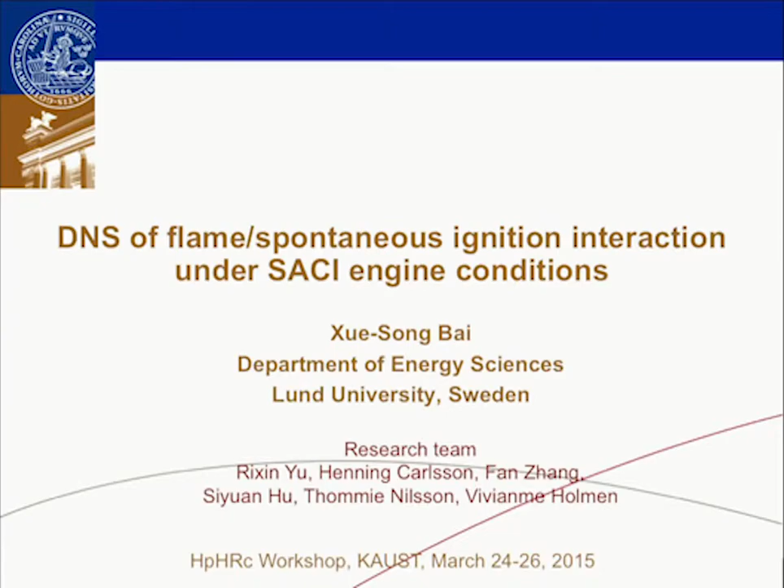We have a research team here. Dr. Rixin Yu is the PhD. He worked with me for many years from his PhD study, and he's the one who developed the DNS code. We also have Henning Carlsson and Fan Zhang, students working on applying the code to different problems.

I have the luck to work in Lund with many excellent researchers. Marcus Aldén yesterday presented the laser technique, which is excellent and can be used to study many different things. We also have a group working on internal combustion engines there, led by Bengt Johansson, some of you may know him.

I'm part of the research activity there, doing the modeling work. This slide I borrowed from Bengt Johansson gives an overview of the recent development in IC engines. We still run SI engines and diesel engines, but we have a challenge: we want to improve efficiency and decrease emissions, and there we have to do many things.

For example, in the past many years, people have been working on the HCCI engine, which is, in my opinion, a hybrid of the diesel engine and the SI engine. There we try to use a homogeneous mixture and compression ignition, using the lean burn concept, so we can have high efficiency and low emissions. But we found that the control of this engine is problematic.

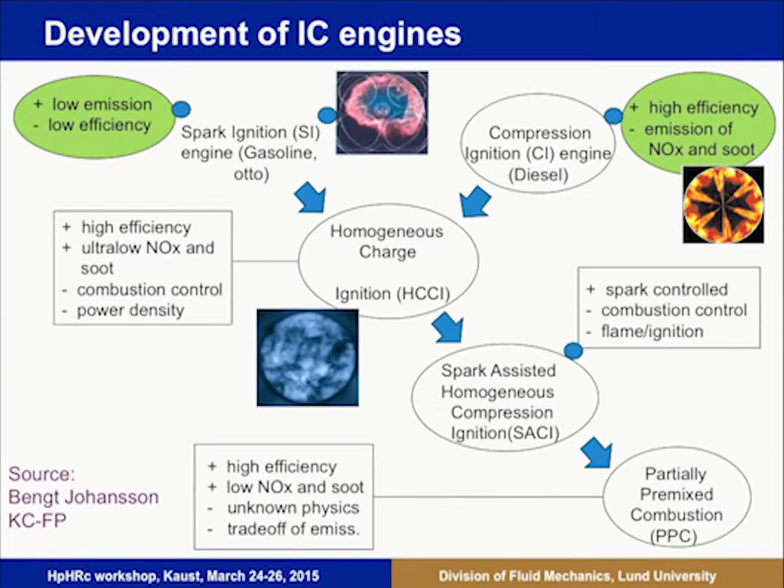Recently, we've gone one step further, or one step backwards, depending on how you look at it. We are working on the concept called partially premixed combustion, compression ignition engine—a type of diesel engine using direct injection, but with early injection, forming a partially premixed mixture. I guess Dr. Kalghatgi, you were the one who showed that using gasoline in this type of engine works very well, because it works as a PPC engine.

We have a small group doing modeling, but we're asked to model these engines, which is actually mission impossible, because the current models available are mostly for SI engines and diesel engines. For these complex engines, we need to go one step back and look at the fundamentals of how this engine combustion structure looks. Before that, we cannot say we have a model that works for this type of engine.

Okay, there's some problem—it's the internet. That's why this is good motivation that we don't just do the modeling as such; we go back to DNS studies.

We have a DNS code developed over a 3 or 4 year period. Thanks, John, for giving a good introduction of this method—we read your paper, and actually we did the same type of numerical methods. A little bit different is that we don't use this AMR, this local refinement; we use Cartesian grids, so we can do simple coding with high order schemes, and we feel that gives more accurate results.

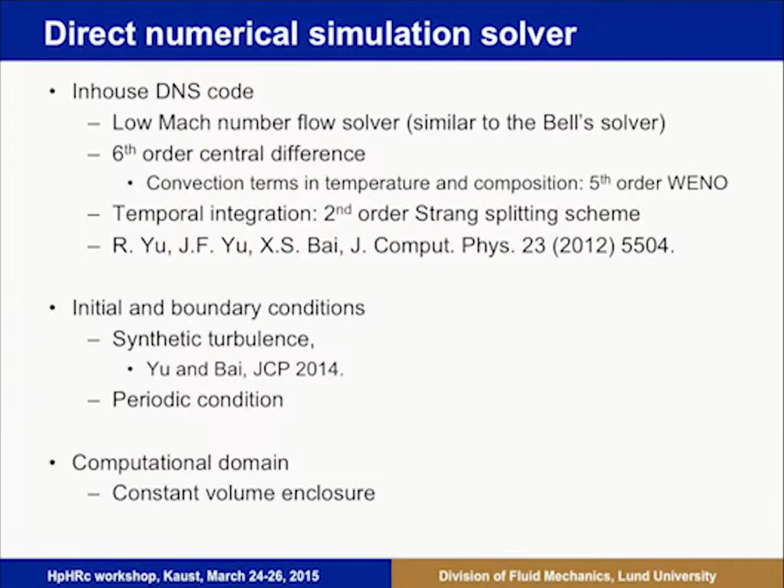So the computation domain has been a constant volume enclosure. This is the closest relevant to IC engines, constant volume enclosure. But we also developed a way based on the low Mach number formulation, the compression effect. The H term actually in John Bell's equation, the pressure equation there, you can include compression effect.

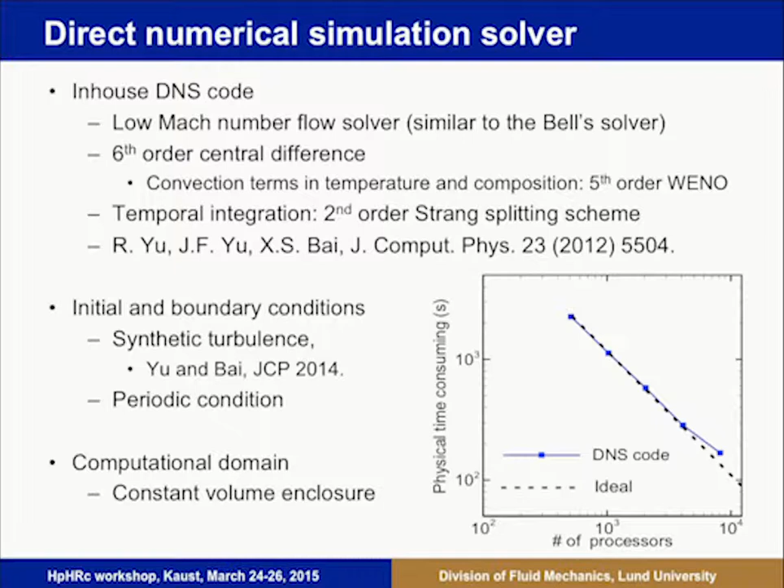So the code has been running up to 10,000 CPUs. It's a very good scaling in parallelization. So I want to give you first a few examples of this code application.

So what we did is, you guys did a 2D DNS. We want to say that this is HCCI type of work. So 2D DNS is okay. So our question is, how about 3D DNS? So we have a 3D code. We want to compare 2D DNS and 3D DNS to see if there's a big difference. I can tell you already, qualitatively they do not.

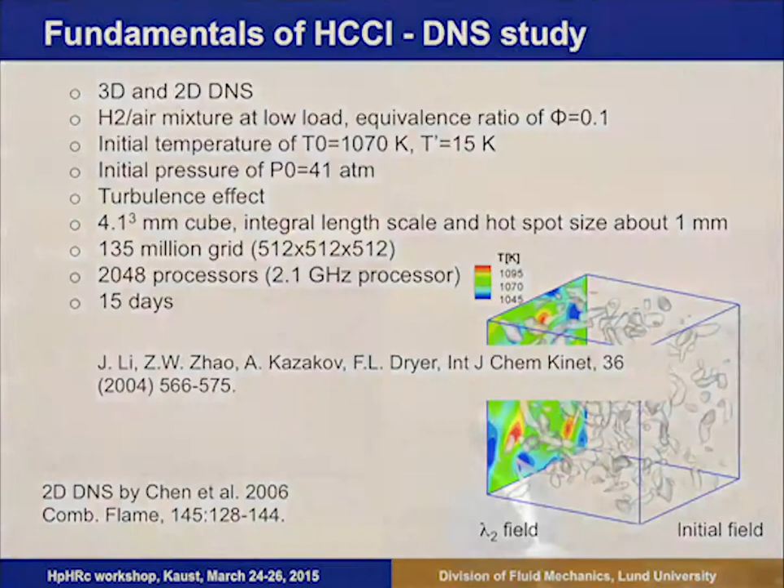Quantitatively they may have some difference because 2D is not 3D. But if you look at the statistical properties, they are very similar. So we're using detailed chemistry from Dryer's group. And here is the difference, the comparison.

In 3D, one of the major discoveries in Eva's work and Jackie Chen's work is that you found that in HCCI you could have flame type of propagation and also ignition type of propagation. Flame propagation, the flame front propagates very slow, and ignition propagates very fast. So here the color is coding whether it is a premixed flame or an ignition front.

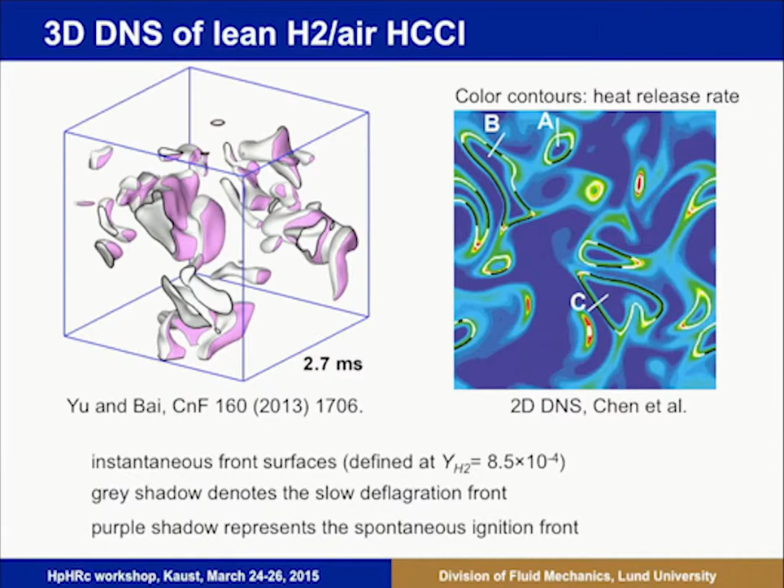What we found is that in 3D, of course, it's not a line anymore, it's a surface. Indeed, you have a premixed front and you also have an ignition front. Some differences between 2D and 3D lie in that you have a curvature, 3D curvature, and also the evolution of turbulence and temperature stratification is a bit different, but that's all.

So comparing the global properties, this mean displacement speed, we see a very rapid decrease from the beginning ignition, and then we see a flame propagation period, and then finally everything auto-ignites. So it burns very quickly at the end. And this is the evolution of the flame surface area.

Sorry, this is the internet.

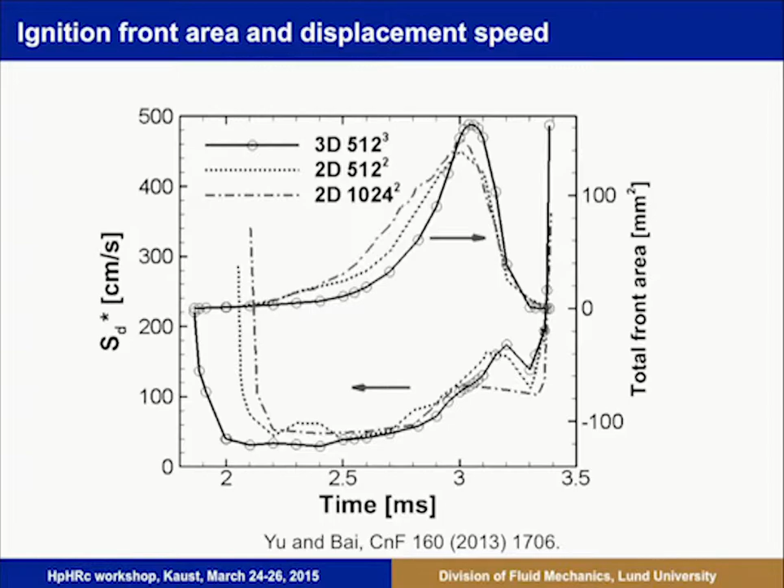2D and 3D are actually differing a little bit. This is a statistical property, but we also test the grid dependence. In DNS we do have a grid dependence, but usually we cannot do a lot of grid refinement. For this case, we did that, and qualitatively they're okay.

The next example I want to give you is the newest PPC concept. PPC engine works better than HCCI, but there is a trade-off between soot, NOx, and unburned hydrocarbons. So the question is why? Engine experiments show this behavior, but it's very difficult from engine experiments alone to understand why.

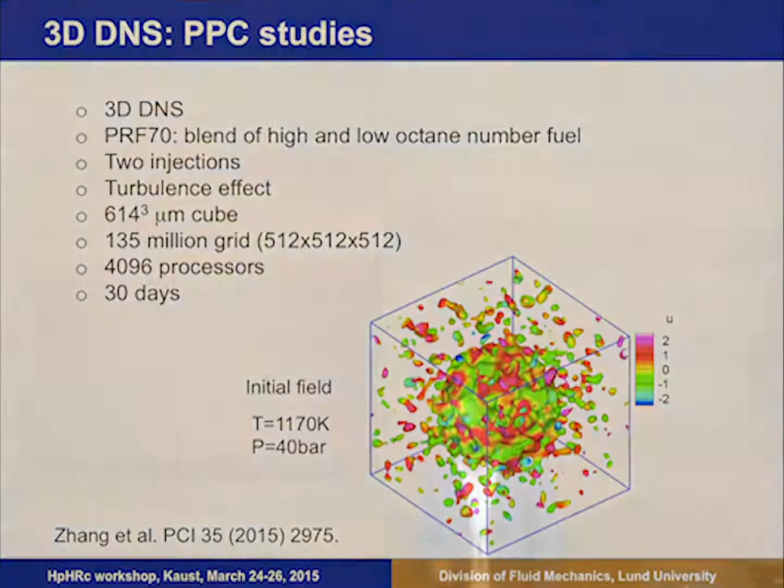So the heat release zone is 10 times smaller. So we have to decrease the grid size, the domain size by 10 times, basically. Otherwise, we would need a 1,000 times bigger computer to do the work. So this was the case. We presented this work at the symposium last time, the previous symposium.

I want to just give you a short highlight of this work. In short, what we found is that in a PPC engine, you have an HCCI type. This is from the early injection mixture. And there it runs like an HCCI.

It's auto-ignition. This is HO2. You can see the heat release rate. You have a volume rate ignition process going on. But what is more interesting is that at the fuel-rich center part, we actually have very thin layers.

It's almost like a flame there. So thin reaction zone. This is 20 microns, so it's very, very thin. You need to have 1 micron resolution to solve this problem. And you can see that the center, this is a PRF fuel. In the center rich part, it's not chemically inert.

It's actually low temperature ignition going on, which can be visualized using this HO2. As you can see here, initially at the edge of this fuel rich pocket, you have RO2, and then it's a volume rate ignition in the center fuel rich part. And then everything is converted to CO, carbon monoxide.

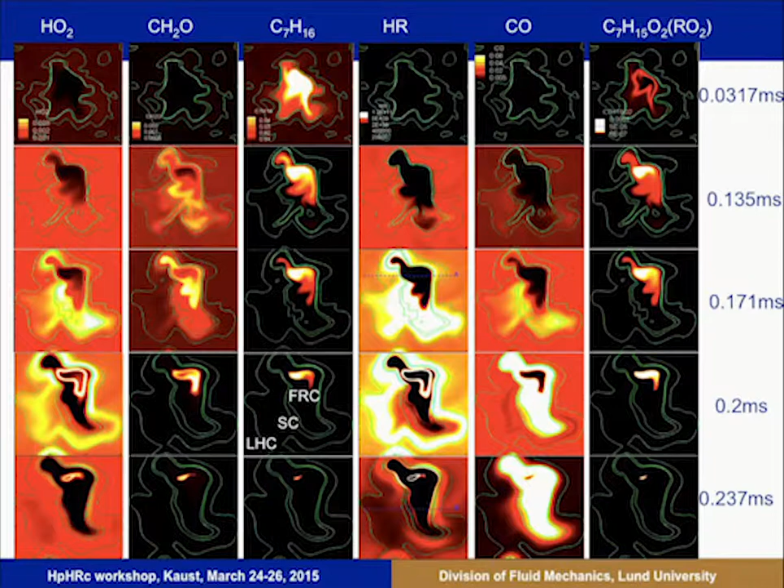And carbon monoxide, here is the bright zone carbon monoxide, is very hard to oxidize. And this is where the thin layer of the flame does the job. So you can imagine that turbulence will play some big role in this type of engine. So even though it's a very small domain, we can learn a lot from that.

We also apply the solver to fundamental problems like turbulent flame interaction in an inflow-outflow domain with a periodic boundary condition. John has shown some work in this direction. I think you are the first group doing this systematic change of Karlovitz numbers. We try to do that.

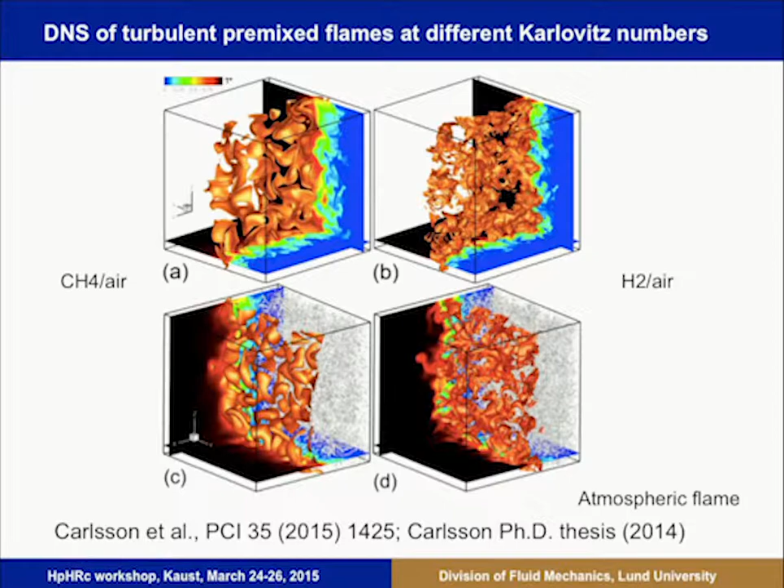So this is what we've done with changing the Karlovitz number. I didn't show it, but we also have Karlovitz number 1, that's flamelet combustion. We changed this, and you can see that this is a little bit beyond the thin reaction regime of Norbert Peters' book. You see that it still looks like the heat release layer. This is heat release layer, and this is the temperature distribution.

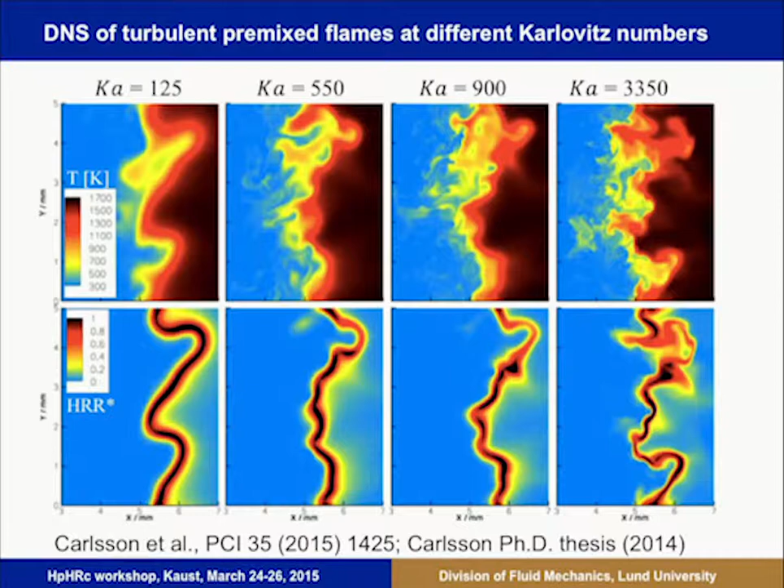You see that heat release occurs actually in thin layers. Even when you go to Karlovitz number 3000, it's not flame-like as such, but because you have some local inhomogeneous heat release, heat release still seems to occur in thin layers. But you can see the preheat zone, which is the low temperature part, becoming more complex, and the reaction layer is actually more twisted. So people say for high Karlovitz number it's easy to model because you use a well-stirred reactor, but actually you have to be careful—there are more fine structures there.

One of the works we discussed in this symposium paper is that we found elementary reactions play a big role in this type of flames. Imagine you have H radicals formed in the reaction zone—they are rapidly transported to the preheat zone. The time scale is so short, it's shorter than the H radical recombination time scale, so therefore there's a lot of heat release reactions, H plus O2 plus M, happening in this low temperature place, which is a very interesting phenomenon.

So in the next few minutes I want to focus on SACI. I've been giving you examples—the SACI work is still under post-processing. We've done this work, and in this type of engine we found a very interesting phenomenon. That is why I chose this flame; I want to discuss it here.

Before I go to the DNS work, I want to show that we also did the LES work—it's a real engine. With these slides I want to show you how SACI works. Imagine you have a homogeneous mixture, homogeneous in mixture but not homogeneous in temperature. So you put a spark, you put a flame, and this flame propagates and is highly twisted because of turbulence-flame interaction.

I'm sorry that I didn't close this internet connection.

But over time, as the flame propagates, the charge in front of the flame can auto-ignite—you're going to have auto-ignition in the end. So we try to bravely develop a model based on flamelet approaches for the propagation of the flame, and also ignition, using a multi-zone type of ignition modeling for the mixture auto-ignition.

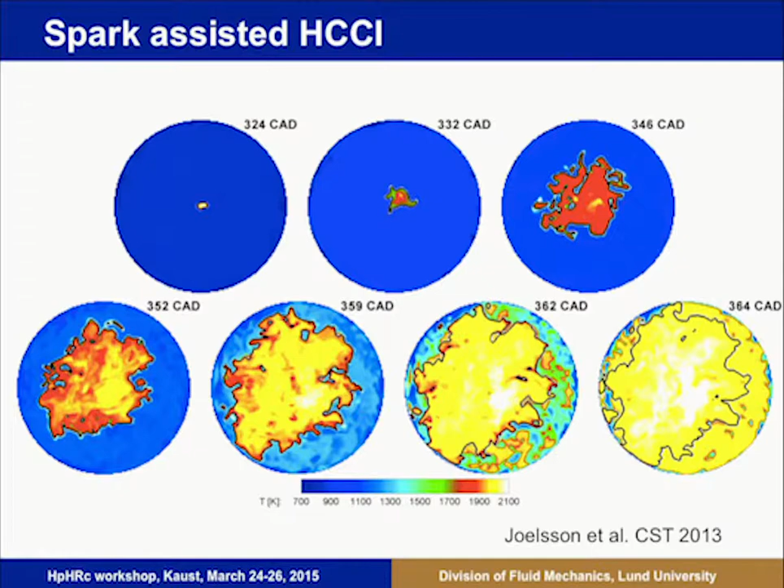In the flamelet model, you always have the problem of what is the displacement speed. If you use that as an input, you're going to have problems because we don't know the actual structure of a SACI engine. We know premixed flame propagation, but in the ignition environment this propagation can be strange—that's what I'm going to show you today. So we need to know the structure and propagation of flame-ignition interaction.

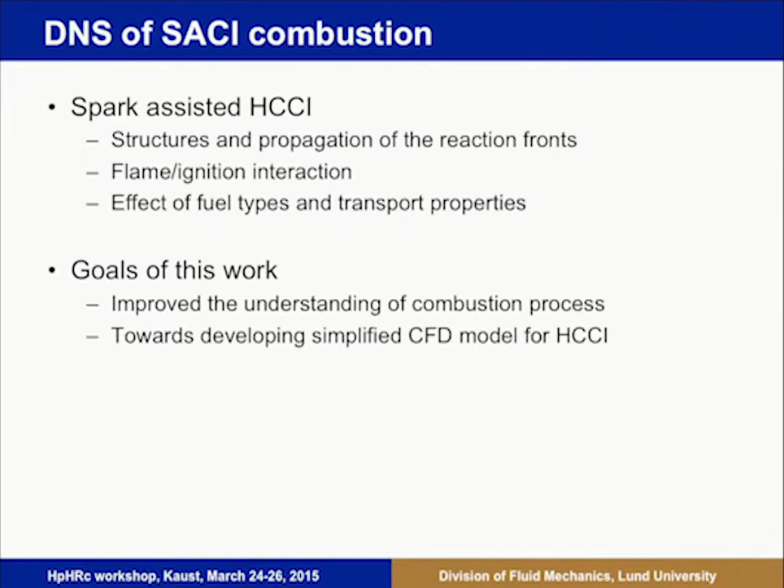Flame ignition interaction also exists in diesel engines with lifted flames, in front of the lift-off—you have a lot of low temperature chemistry going on there, so it's an issue of interest, especially for fuel types. Different fuels behave differently indeed. So the goal of this type of investigation is not to simulate the engine but actually to improve understanding, and hopefully based on this we can develop RANS and LES models.

We have to still limit our domain to a very, very small size—I'm sorry for this very small domain. We need a computer 1,000 times larger to do a sugar-cube type of domain. So it's a 3D DNS.

We have initially put turbulence there. It's a homogeneous mixture, even homogeneous in temperature, to simplify things. We put a premixed spherical small flame in the center of the domain, and these are the setup conditions. We have a pressure of 60 bar—whether the ideal gas law is working at this pressure, I hope it's working.

Seems okay based on Joe Oefelein's work. They did a lot of such supercritical fluid simulations. It seems that even in this high pressure, high temperature condition, ideal gas assumption can still be useful. So these are the setup.

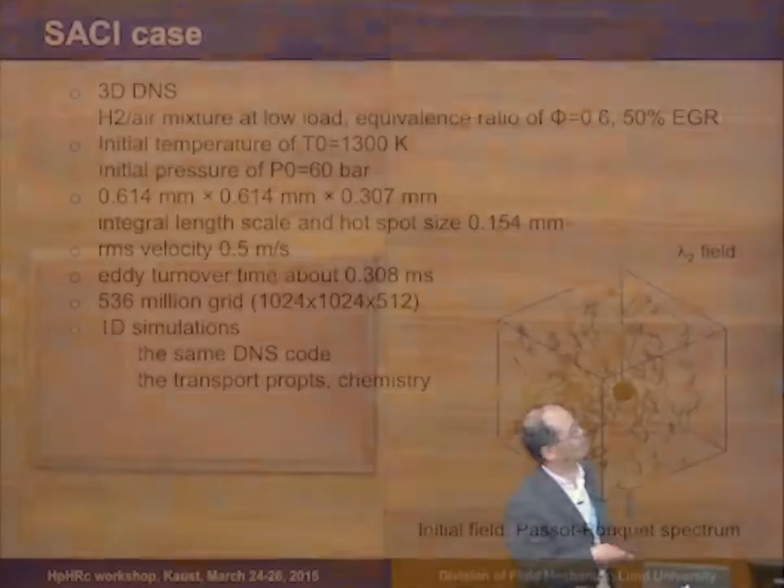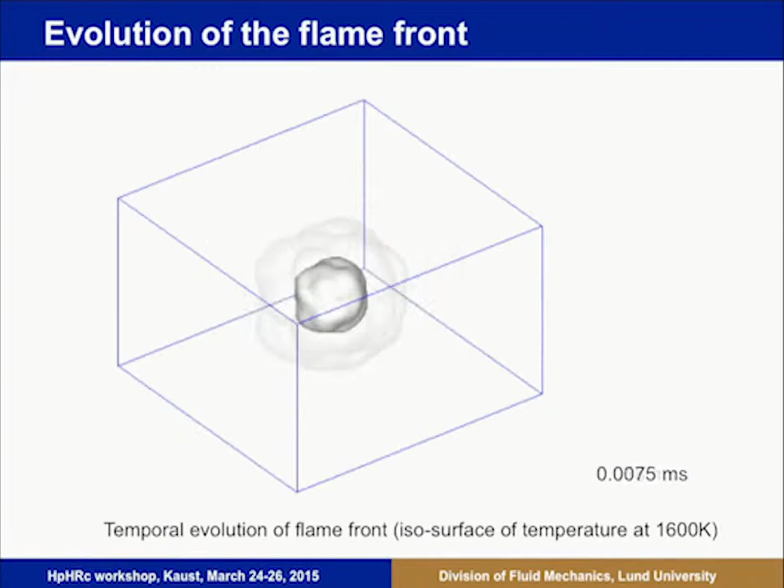We also did 1D simulations afterwards to better understand the chemical process, using this same mechanism. This is after a very short time—deliberately made so because we increase the initial temperature to very high, so the ignition can be fast, allowing us to simulate the case.

So next, it develops initially from a spherical homogeneous flame, becoming a cellular type. We saw in the lab yesterday the ignition process of rich isooctane, where you see a lot of cells. This is probably a combination of hydrodynamic instability and diffusive thermal instability.

In this case, we run hydrogen, so we have both effects. Next it becomes this, and then like that. Afterwards, we don't have this structure anymore because everything ignites.

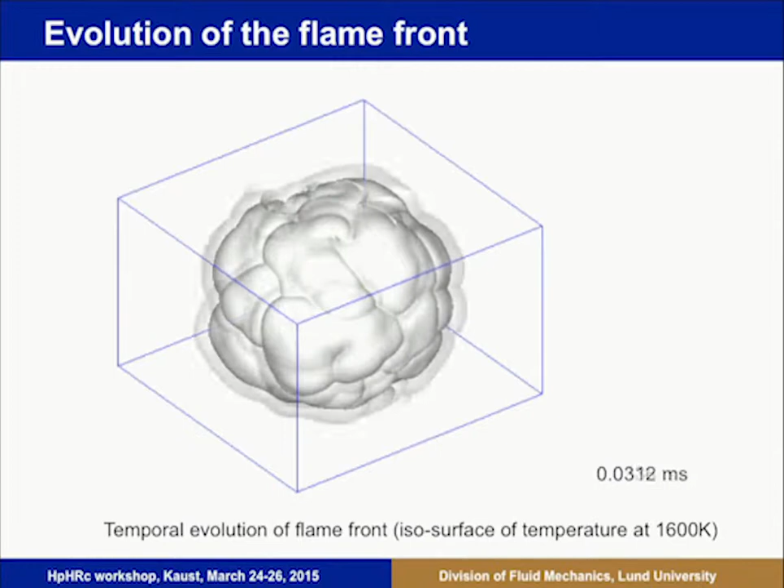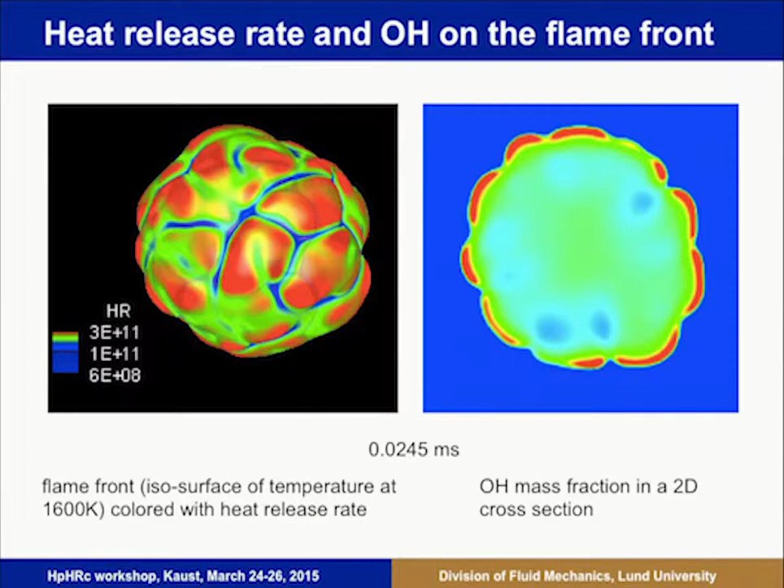If we look at the evolution of OH in time, we can see so far it's like a flame—a cellular flame that is growing. The reaction zone is very thin here; this is the OH layer.

In the reaction zone, it's a super-equilibrium OH, perhaps, and this is basically a post-flame zone. There, you still have OH.

Now, at the next time, you're going to have everywhere auto-ignite—just before the whole thing explodes. So we have a peculiar phenomenon here.

In front of the reaction front, just before ignition, there is actually a very low OH layer. This very low OH layer actually damaged the flame propagation.

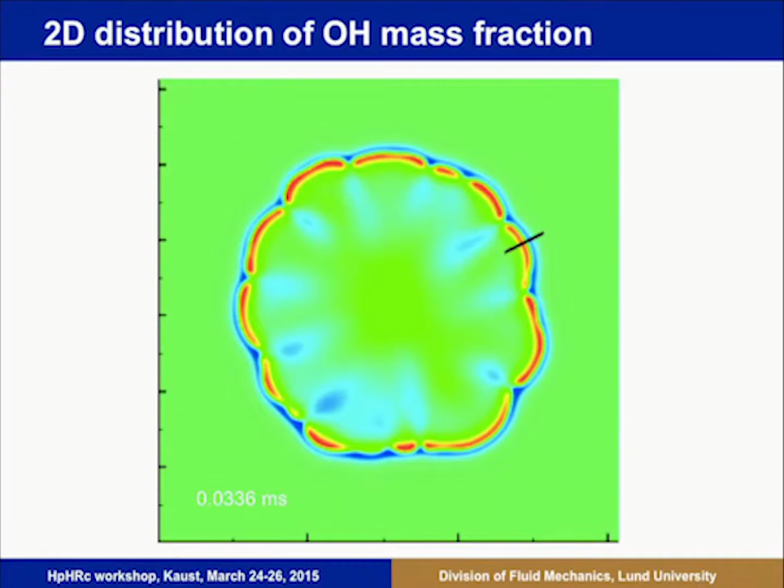So here, I will quickly finish. I want to show you the heat release rate—everything is very thin, and suddenly you have heat release in the end, everywhere. And this is temperature, so everywhere you have it.

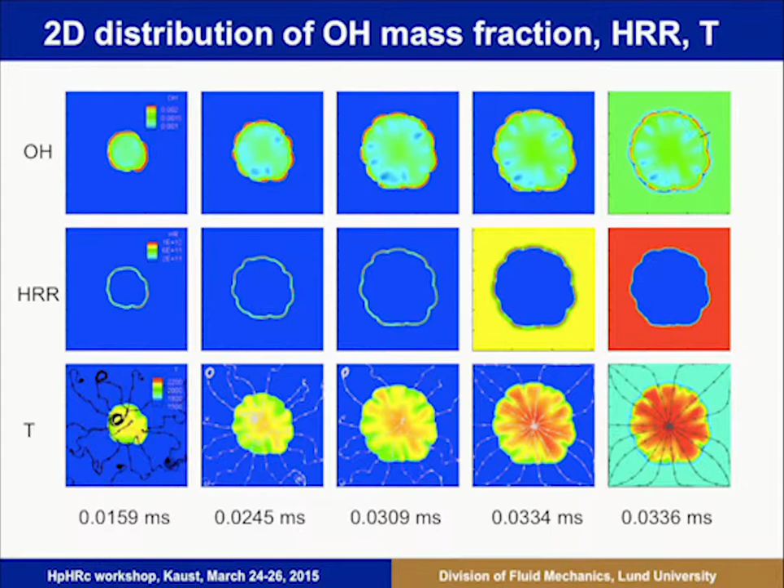This is the initial turbulence. The turbulence field is destroyed by the expansion, so basically here we probably have a very low turbulent Reynolds number.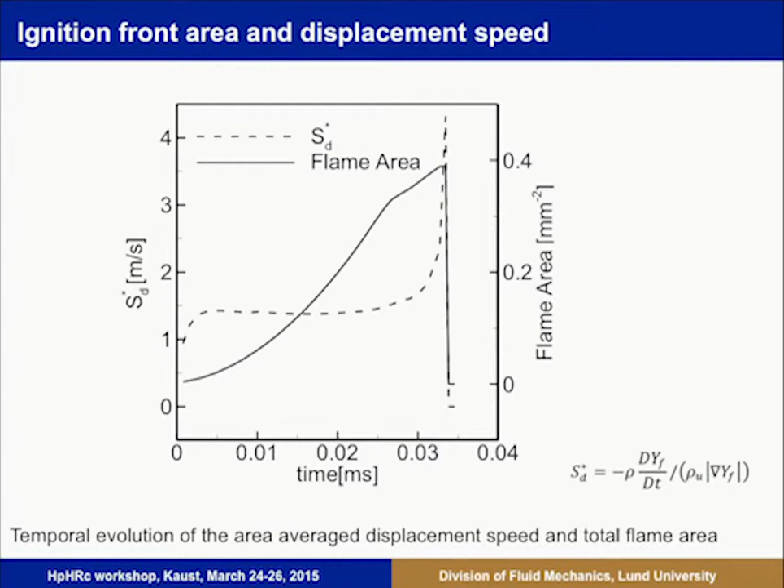We can do the flame speed analysis, which shows that very rapidly you have a boost of flame propagation because the flame becomes cellular, but then it actually decreases a little bit—the propagation speed drops because of the OH layer, which is rather low in front of the flame.

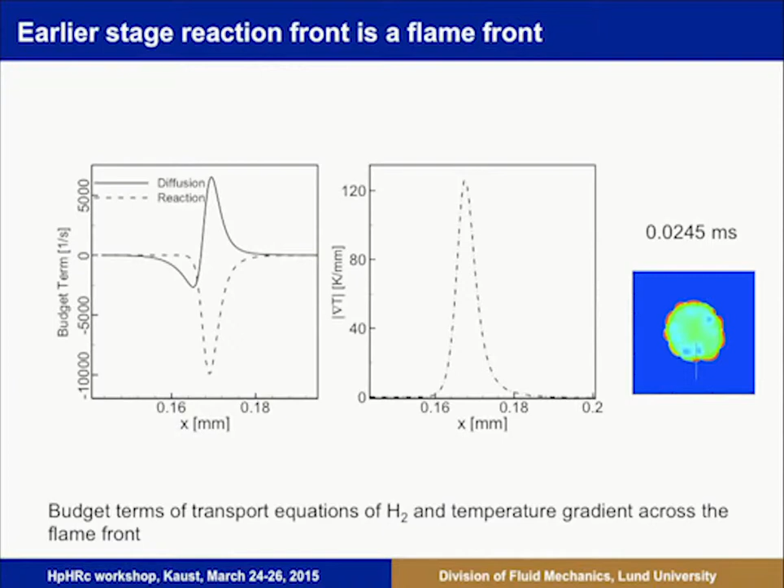We examined the structure of the flame by plotting the budget terms: diffusion and reaction. They are comparable at an early time, meaning this is flame propagation. At a later time, you have very high reaction but the same diffusion, so this is ignition-driven at this moment.

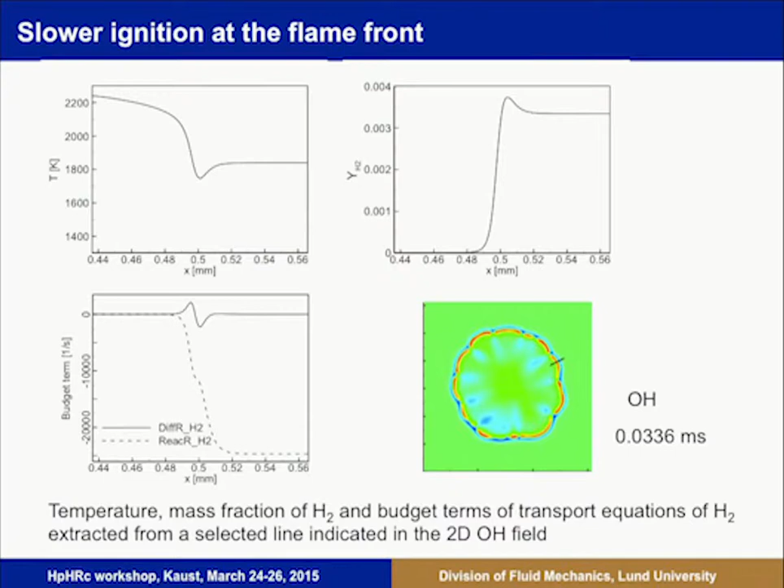To understand why the OH has such a strange behavior, we did a lot of simulations with different domain sizes and temperatures. We decreased temperature—now we simulate 1D, so we can do any temperature, even 800. We can also change the diffusivity, taking away numerically...

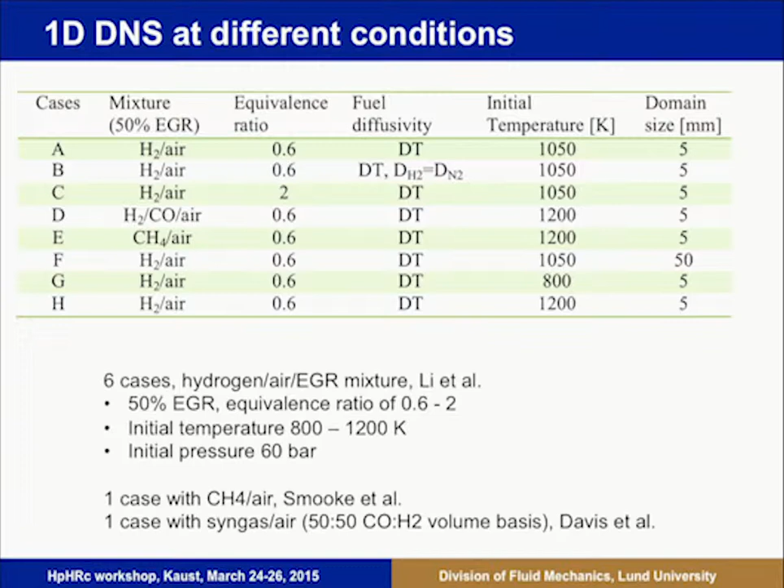...the differential diffusion effect. We found that in 1D, we also have this behavior, actually lower. In this case, with a larger domain, it's not lower, but the increase of flame propagation speed is very low.

We would expect that because heating occurs in a constant volume configuration, it can increase the flame speed, but it does not—actually because of differential diffusion. When we change this differential diffusion, it monotonically increases. It's actually a much faster propagation than the same hydrogen case where we deliberately change the diffusion—the speed increases 10 times or much faster.

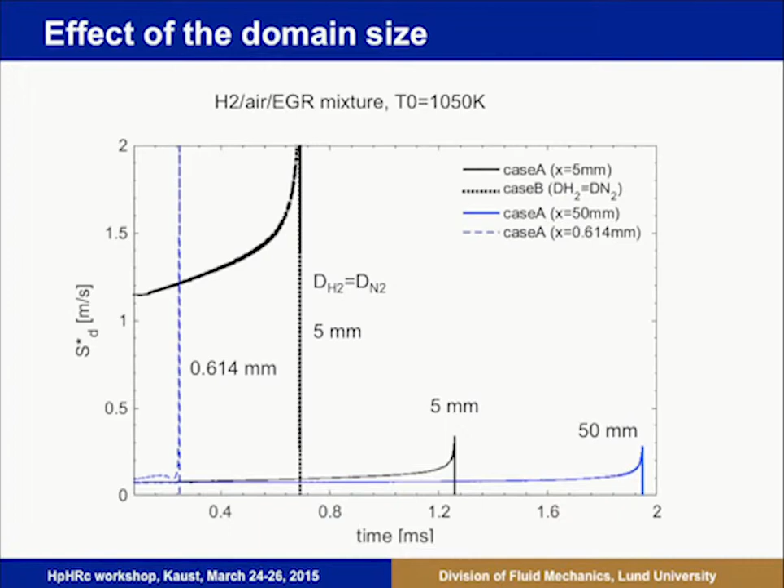So hydrogen diffusion destroyed the propagation. We plot the temperature here: just before ignition, we actually have a lower temperature than the far-field unburned mixture.

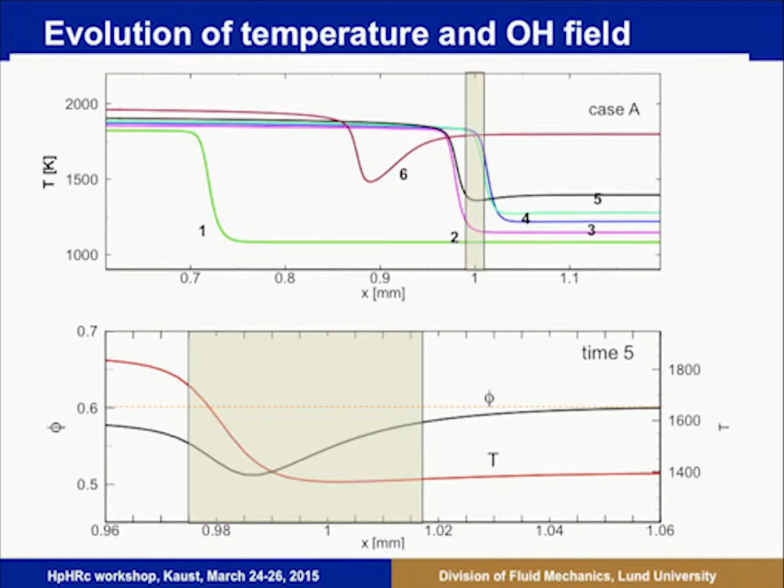We examined the main reason, and it is actually because of differential diffusion itself. We have phi that is very low—this hydrogen is diffused to the burn zone at an early time, so we got a sink of hydrogen.

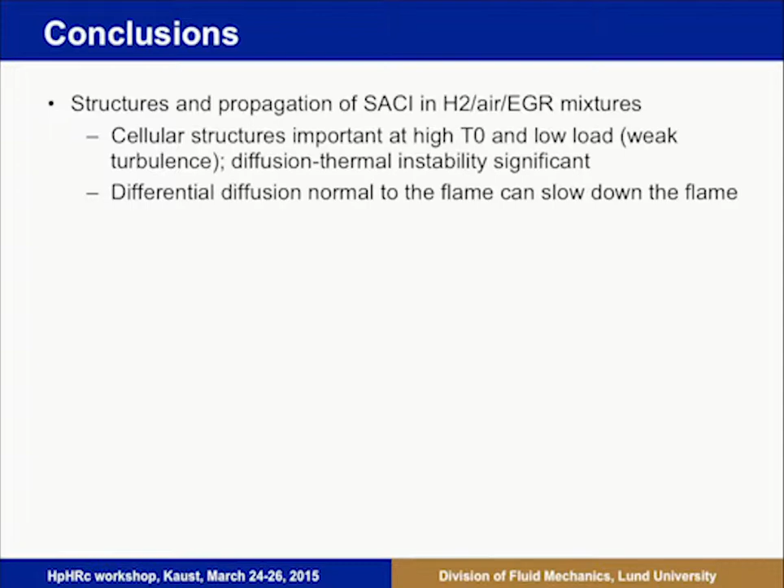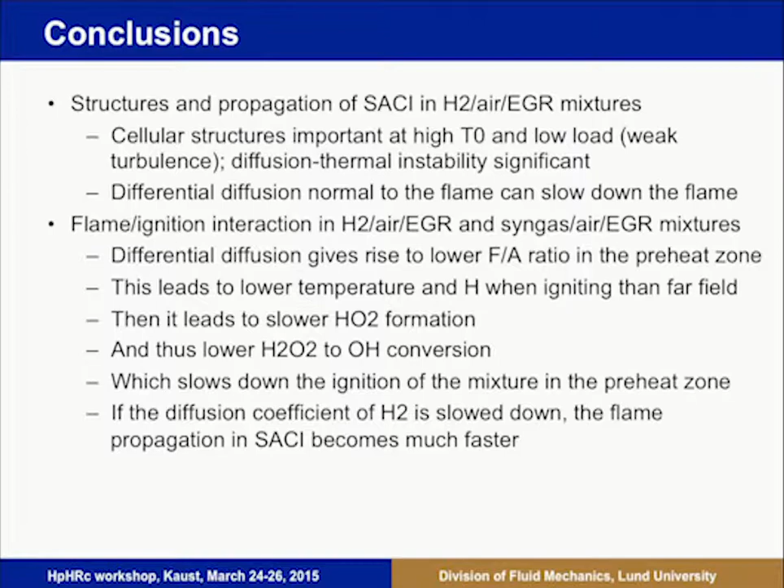We then examined many elementary reactions—I don't have time to show all of it, so I'll go to the summary. Eventually, we found the main reason is that differential diffusion first changes the equivalence ratio in the preheat zone, which affects the H radicals. The H radical recombination reaction in the preheat zone provides H2O2, and H2O2 provides OH in the end. This process is actually slower in the preheat zone than in the far field, and that is why everything slows down.

So by that, I finish here. Thank you.